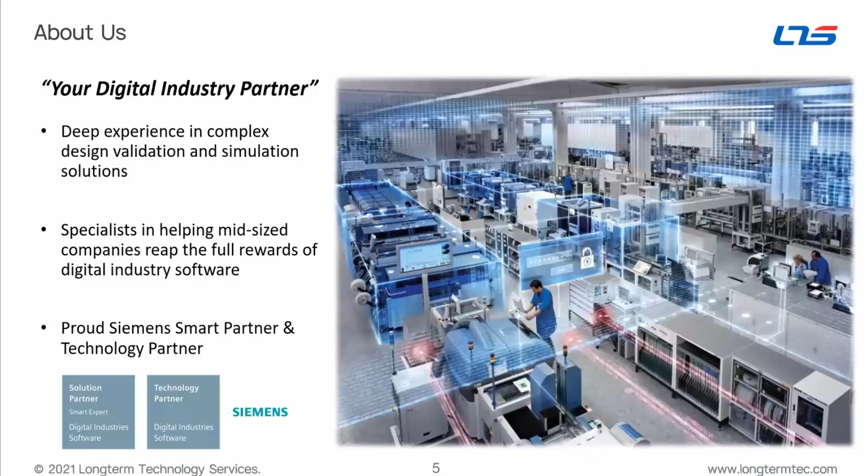Today we're going to be talking a bit about how the digital twin can help you reduce your robot programming time by generating your robot code in the virtual world. But the next webinar is going to be more about directly connecting that virtual world with the real world, through either virtual PLCs or real hardware, where you drive a simulation with your real PLC in order to validate and generate that PLC code.

Here's some things we're seeing at LTS, some key trends we're looking at. There's a number of trends forcing companies to become leaner, smarter, more agile, while somehow increasing the quality of their products. Some of these trends include consumer-driven customization, smart machines, hyperautomation, and global competition.

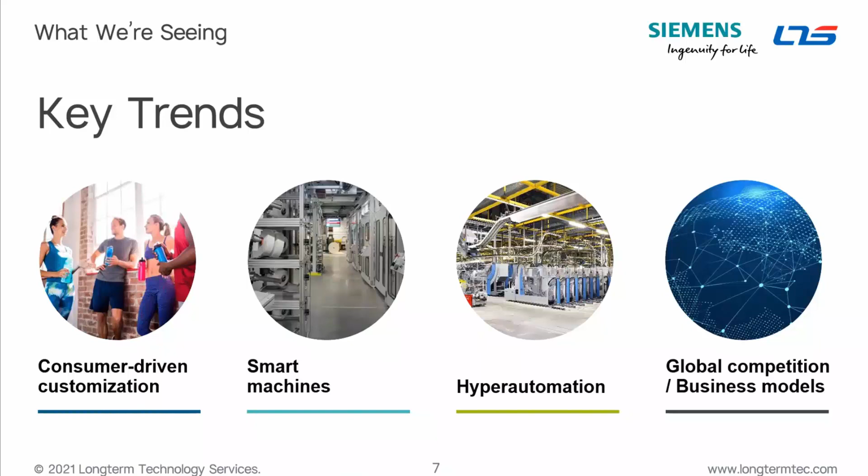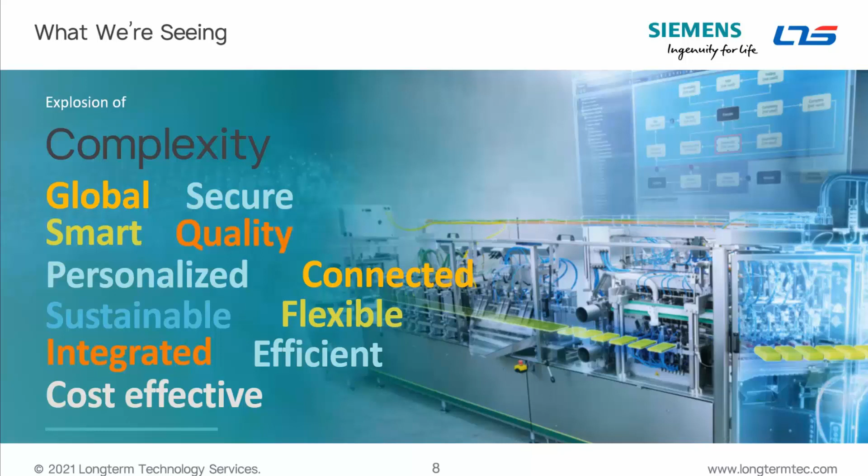Everybody is really feeling these things. At the end of the day, we're seeing a real explosion of complexity, but the real question is, can you deliver more complex things at higher quality in less time? That's not an easy thing to do.

We believe the holistic digital twin is really the way to address these challenges. So what do we mean by digital twin? We like to distinguish digital twin from traditional simulation. Traditional simulation is usually a geometric or kinematic simulation that's pretty theoretical, pretty hypothetical—it's not the reality.

But a digital twin is really a virtual replica of your product or machine that goes into realms like electrical engineering, mechatronics, thermal, you name it, using physics-based modeling. What's most important for this webinar is that you can use these to generate and validate your robotic programming and PLC, which you can then export after validating it in a virtual setting. So now you're talking about a type of simulation, a digital twin that offers a true stand-in for a real object or system, and you can even connect back to that in real time through sensors.

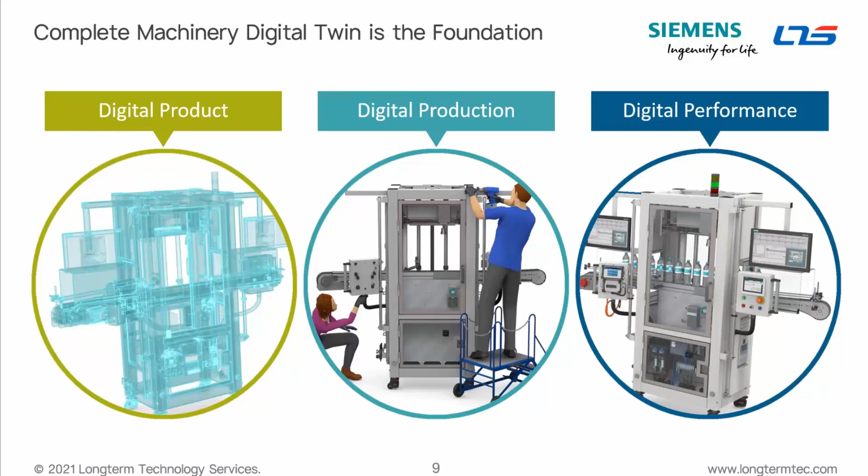That has really big implications for the way we do things in manufacturing and automation. This approach allows you to do what we call shifting left. So shifting left, if you think about a timeline, is about bringing more of your manufacturing and automation concerns, and more of that work, into the design and engineering stages of your product lifecycle. You can do this by performing more work than ever before in a virtual setting, with total confidence that when it comes time to really manufacture or commission that product, you can do it error-free.

So you're not stuck tinkering with a fully assembled machine and production line, losing time and money in the process while you're tinkering, or in many cases experiencing collisions and interferences that you have to figure out after the fact. That can all now be done in a virtual setting for much less cost, much less time, and greater accuracy than ever before. That's really one of the things that has changed and made that type of approach more feasible.

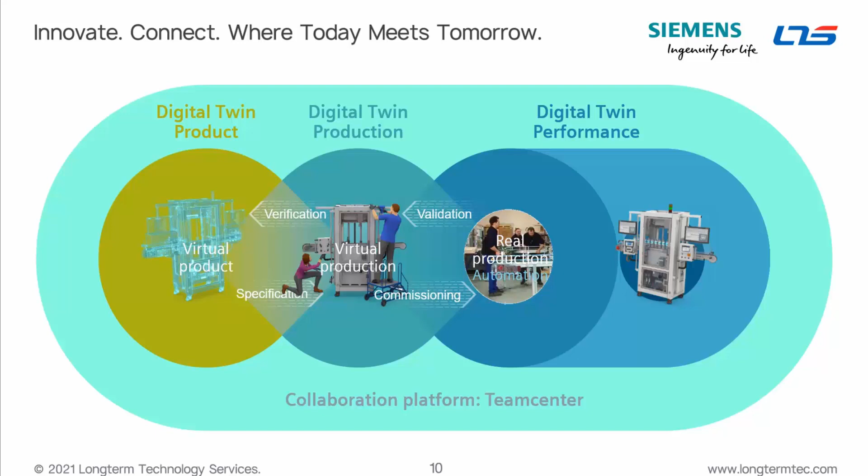Once you've decided that you're going to work with a digital twin, it becomes a question of what scope is right for you. Digital twin technology runs all the way from plant level simulation down to the level of the production line, robotic work cells, robot station, and all the way down to virtual PLC and HMI simulation.

For the purposes of this webinar, we're going to focus on this second level, the robotic station or the line. In our previous webinar, which we will make available through video, we focused more on the entire plant level. Now we're moving down into that robotic programming at the level of the robotic station or the line.

Let's start with some of the key challenges faced by automation and line builders, and also OEMs, during the project phase. First, we should be able to validate cell components that were designed in any CAD system, for example the fixtures, jigs, or other cell components. Going one level up, when we have different robots based on customer requirement, we should be able to offline program it and write specific customer syntax.

Typically it takes a robot-dependent solution provider's solution to program a robot, but in our case we can take it in a single platform. Going forward, you should be able to create a path which is free of collision, and the robot should be able to reach all the locations in the process.

With this, we want to ensure the build quality of our production line. Then we want to go ahead and ensure that we are meeting cycle time compliance required by the customer, finally to meet the throughput requirement of the customer.

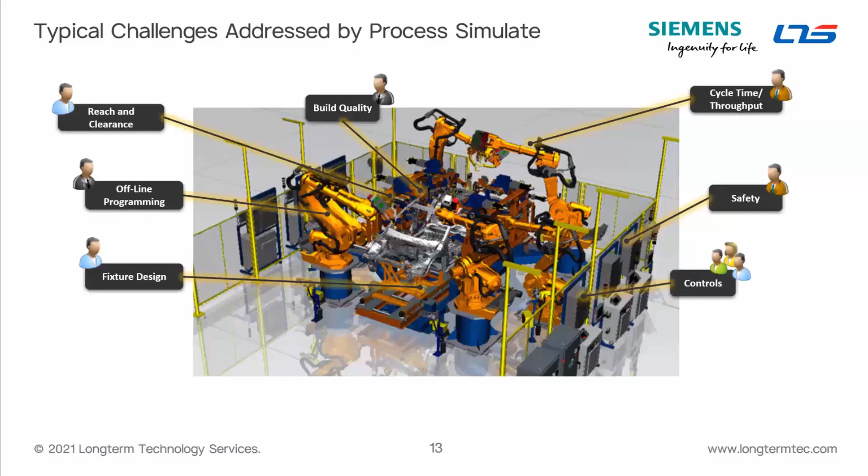Going a level up, when we have automation components such as safety parameters and control logics, our strategy is to utilize digital twin and program it, maybe connect a PLC to the digital twin and drive the simulation, test out your code. Finally, we should be able to optimize the space occupied by the cell components in the line.

What happens here is it's a complex setup. In this complex setup, we should be able to find bugs during the design phase itself, download the program directly to hardware, and save some cost during the construction phase. These are must factors to ensure regulatory and customer demands. This is where Siemens OLP and simulation tools come into picture, which can provide a single platform to validate all these aspects.

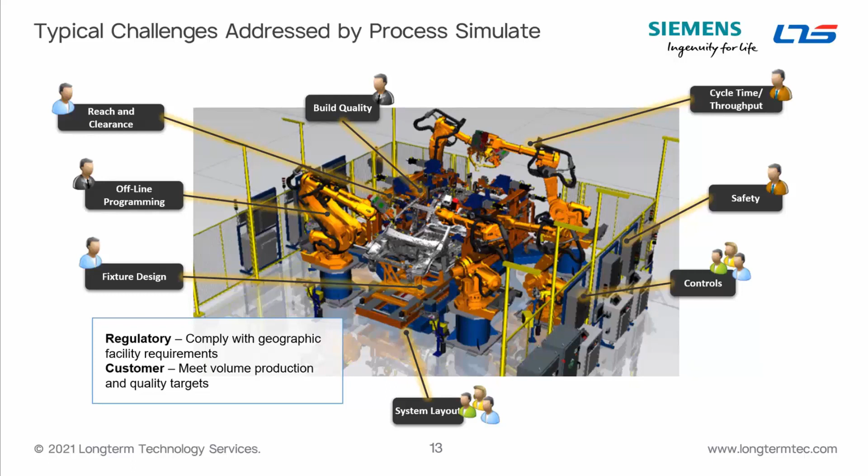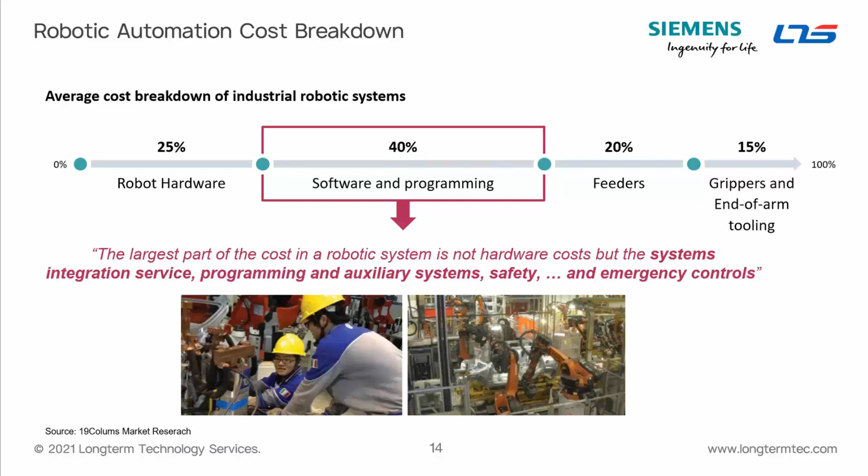When we think of robots, we think cost of hardware is the major investment. Based on market research, it's found that a major chunk of investment goes to robot software and programming. This major cost is spread over the lifecycle of the robot, including cost of integration all the way up to emergency controls.

So how can we reduce this? The solution strategy that we are proposing is to utilize one simulation environment to plan, validate, and handle all the robotic and automation aspects throughout the entire workflow, starting right from simple process definition, ending with a complex virtual commissioning task.

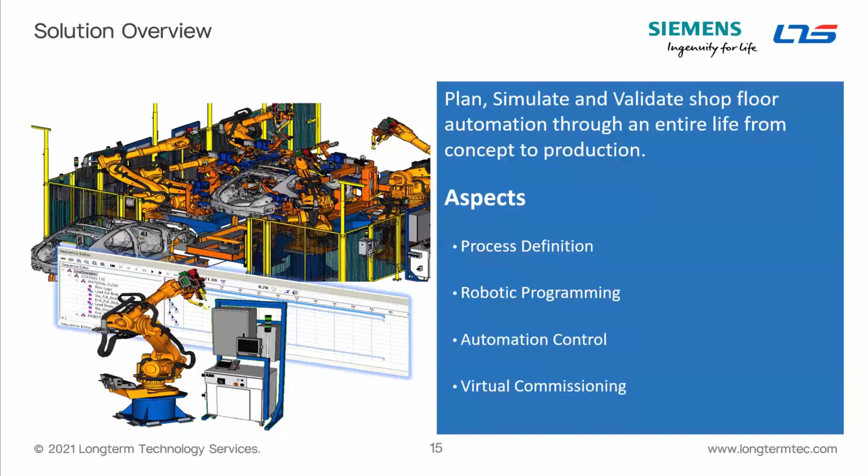Today we will see how you can utilize one simulation platform to simulate robotic cells as well as program it, extend the scope to modern material handling systems such as AGVs, robots mounted on autonomous vehicles, use advanced robotics to teach robots directly, which is called hybrid programming, and finally see how we can collaborate in a virtual reality world for a smart review.

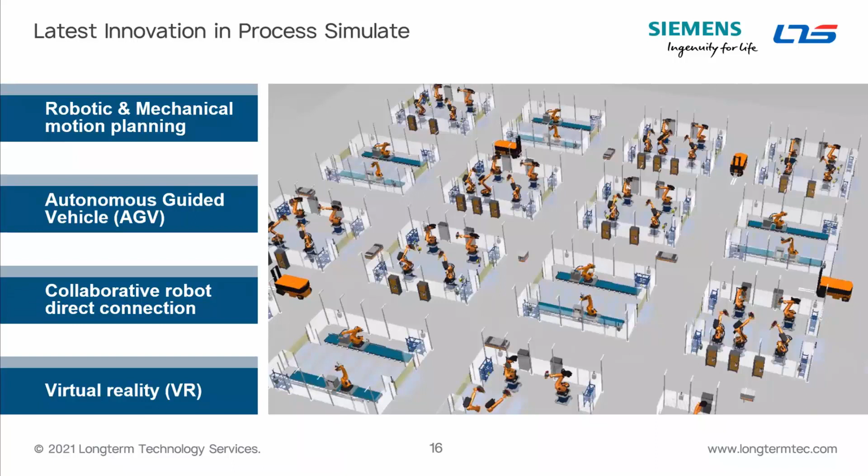So let me begin with the first one, robotics and mechanical motion planning. To build a digital twin of your cell or line, you can import data from multiple CAD systems, for example SolidWorks.

Now you bring in CAD data. You can also bring in robot models from the library, from multiple vendors. We bring that in and start building the robotic cell.

Once we build the robotic cell, we want to create a path that's collision free. With a few clicks, you can offline program the robot once the path is defined. Once the offline program is ready, we download it with a specific robot syntax—for example, Fanuc has its own syntax—in a specific file format. We support all major industrial robots, including ABB, KUKA, and more.

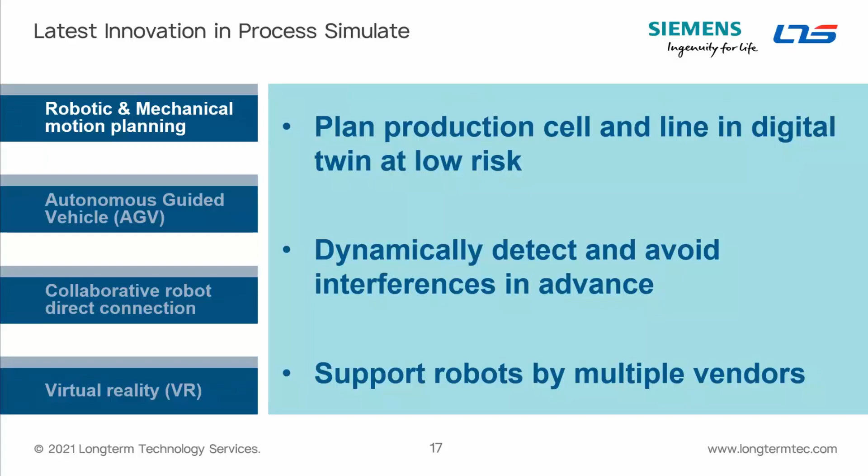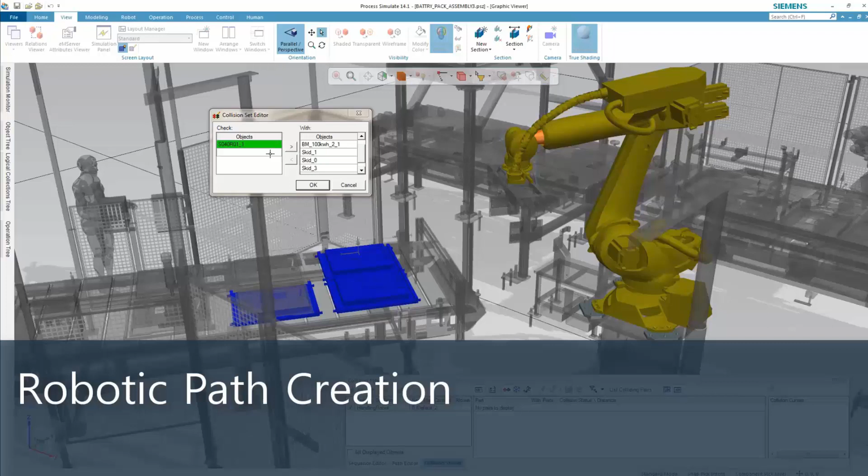In this example, we'll first see a robot collision detection with the cell components and how to avoid that. Second, we'll see robot path creation. Finally, we'll see how easy it is to create an offline program in Process Simulate environment. Let me go ahead and play the video.

During the robotic path creation phase, collision detection is a crucial aspect. Process Simulate helps you dynamically detect collision during the robot simulation and motion planning phase, providing shop floor worker safety and preventing costly equipment damage. In one customer case, the robot collided with equipment, resulting in loss of production time. Using the collision detection mechanism, you can carefully analyze where the penetration is—whether it's a near miss, a through collision penetration, or just a contact collision, as shown on screen.

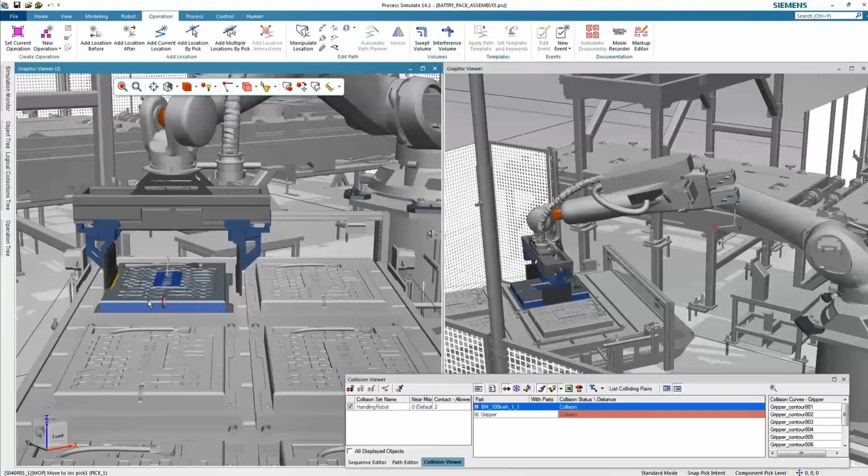At this point, we want to avoid the collision. We can dynamically add a robotic location or modify an existing one easily. You can dynamically drag, drop, and interactively play with the robot cursor. You can copy paste a location and drag and drop it, change the location position within the sequence, rename the location, and more.

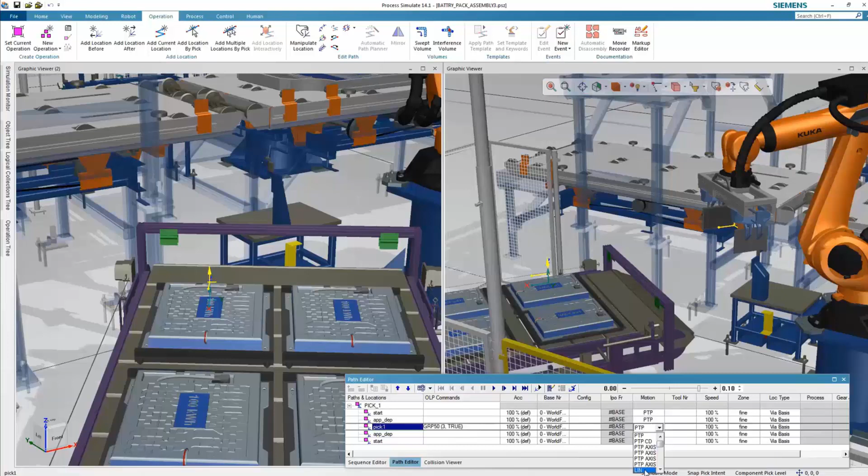Then we simulate the updated path to verify changes have taken effect. You can simulate the entire process sequence in a single shot. At this point, we can go ahead and create the OLP program. Further, we can change motion parameters, such as from point-to-point to linear motion type, and the speed of that location.

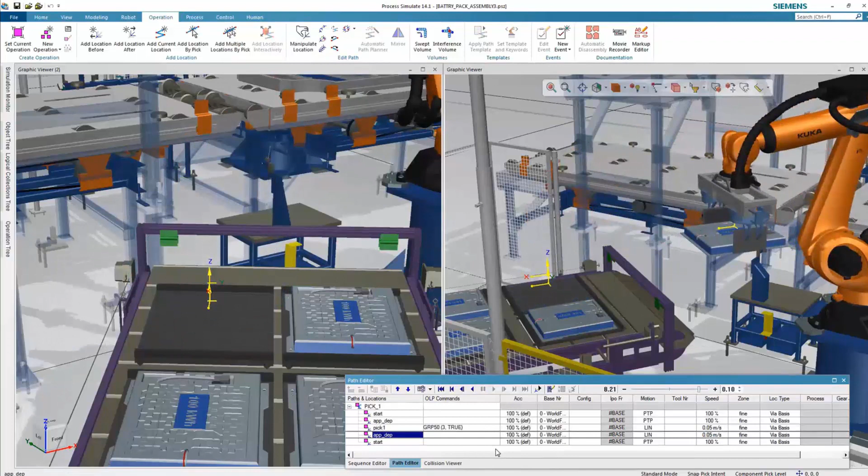Once the OLP program is done, the program with specific robot syntax can be directly loaded into a robot. This gives a major advantage over the online programming method or teach-pendant programming method. So to summarize, using our solution you can create a robotic path free of collision with ease, perform robot programming in offline mode with robot-specific syntax to save time and money, and optimize the path to achieve lower cycle time.

Next, we'll see AGV and robot mounted on AGV cases. Typical material transport equipment used in plants and warehouses is quickly being replaced by automated and smart systems, and AGVs are leading the transformation. Our solution provides one platform to create AGV paths, avoid obstacles, and finally virtually commission an AGV fleet.

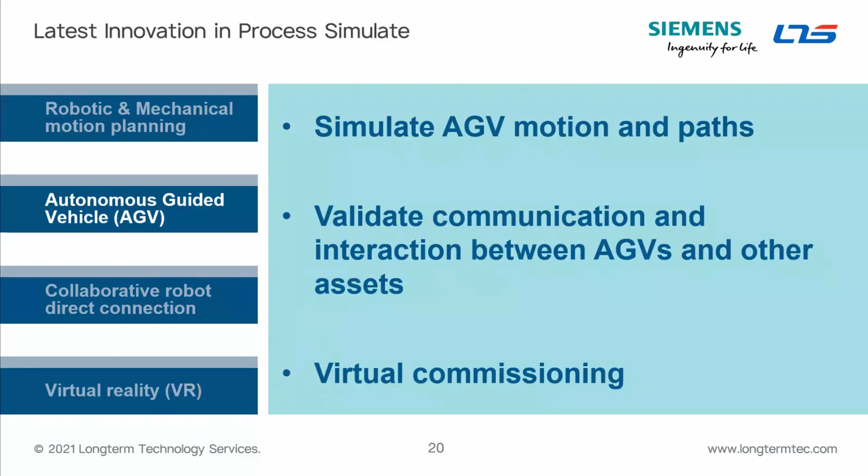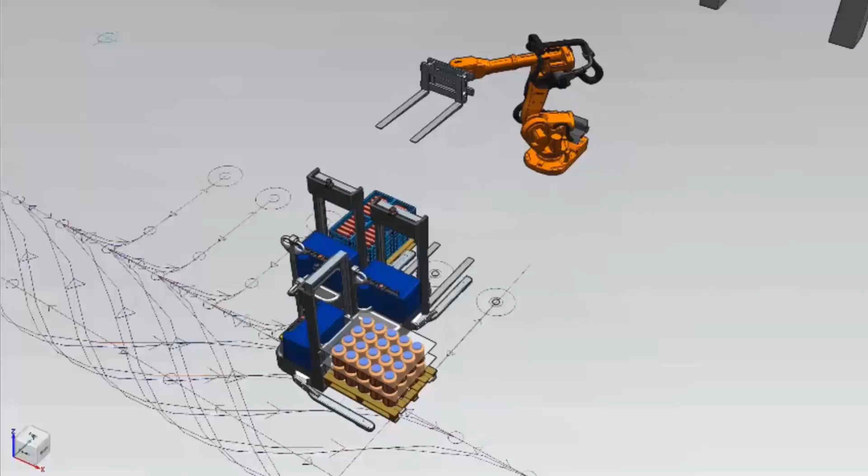Let's see an example. In this real life example, you can see how we simulate AGV paths, the interaction of AGV with augmented automated systems, and finally how Process Simulate serves as a virtual test bed for testing an entire fleet of AGVs. Let me go ahead and play the video.

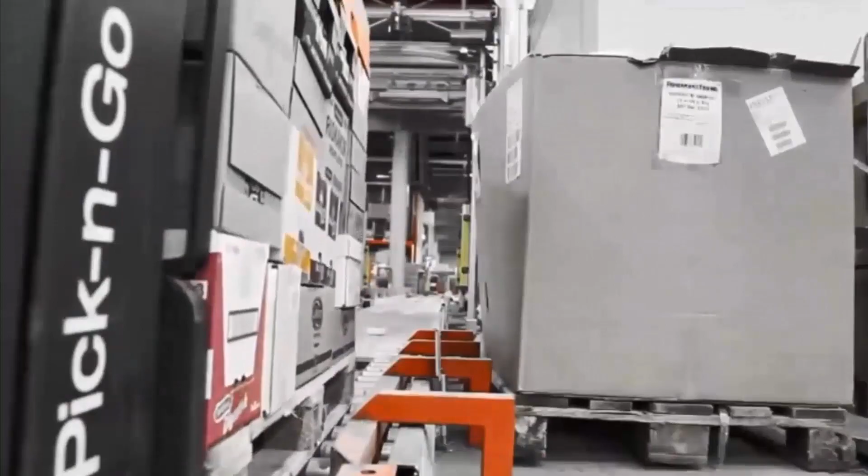AGVs are more and more frequently adopted in warehouses and logistics. You can analyze throughput of a system with multiple AGVs, validate AGV behavior, and combine AGVs with industrial robots together. At this point, we can see an AGV interacting with the robot. You can take advantage of PS to validate AGV path selection and how it interacts with other automation assets.

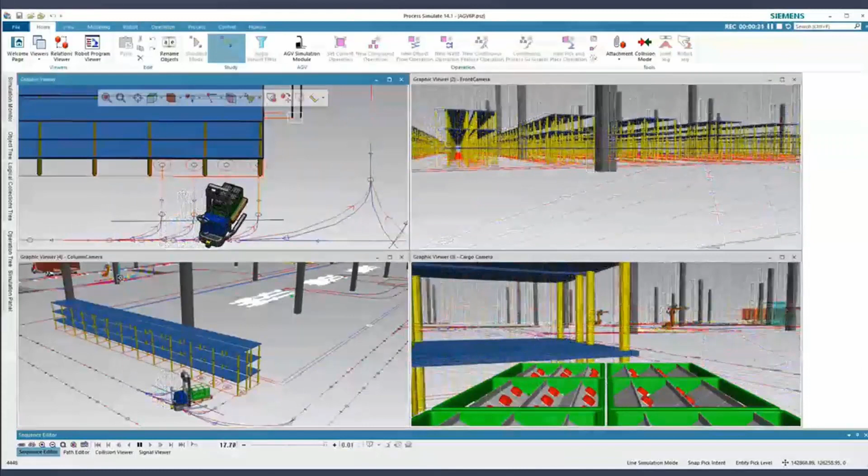When PS is connected to an external AGV fleet management system, its virtual commissioning functionality allows PS to become a virtual test bed. At this point, you can see the AGV interacting, and you can see where there's a collision or not. Basically, the AGV is interacting with the cell components.

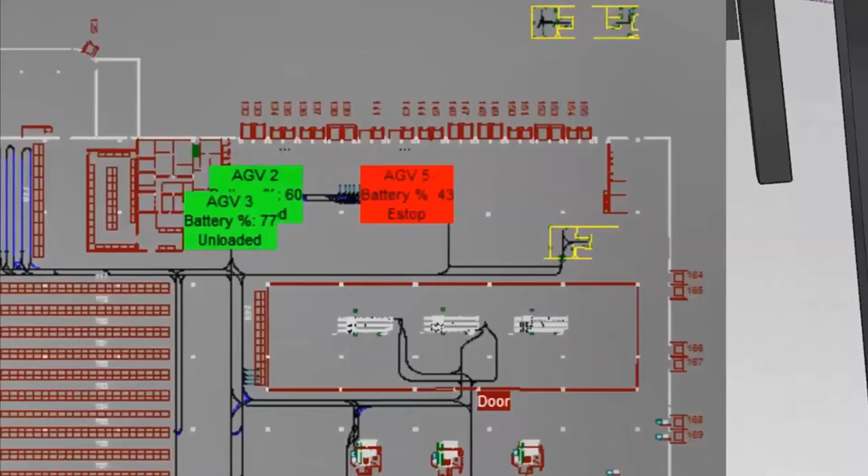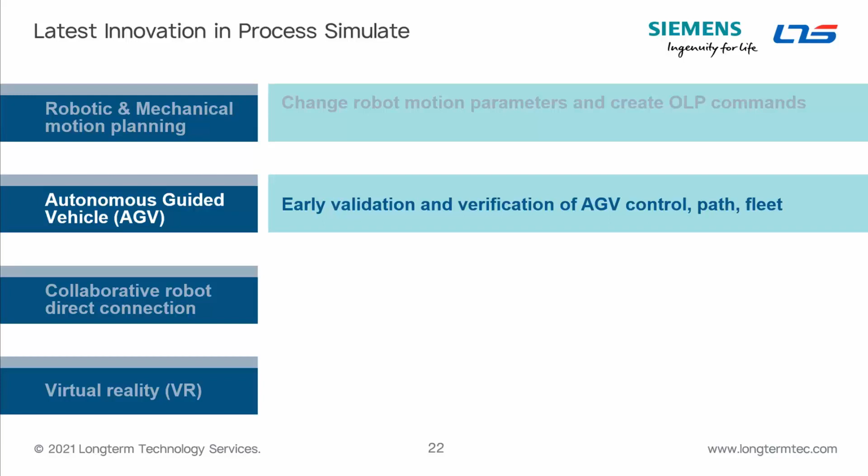Once we have a fleet management solution connected to virtual commissioning, we have direct communication between them. We can detect a human, for example here, and commission the entire AGV fleet. This allows us to minimize the risk and cost of commissioning. Using digital twin in a simulation environment, we're able to simulate detailed AGV parameters such as AGV control, path, and fleet management strategy.

Let's see our next example, a hybrid teaching technique. Here we'll use a universal robot, leveraging the digital twin of a cell and a robot, to validate the entire manufacturing process. PS can connect to a universal robot to replicate the movement of the digital twin. Let me show you how we utilize a hybrid environment using real hardware, a real manipulator, and a digital twin in Process Simulate.

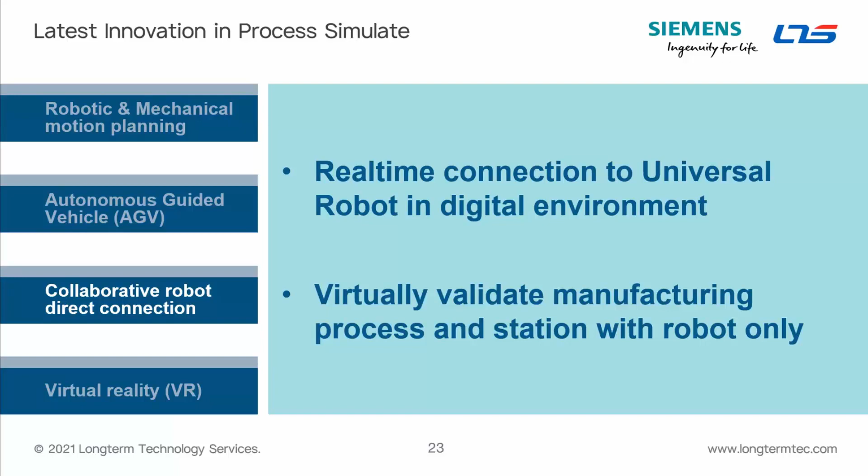In this example of the universal robot, we'll see hardware interaction in online programming. Digital twin motion updates in real time. Real robot interaction with the virtual cell. Let me go ahead and play the video.

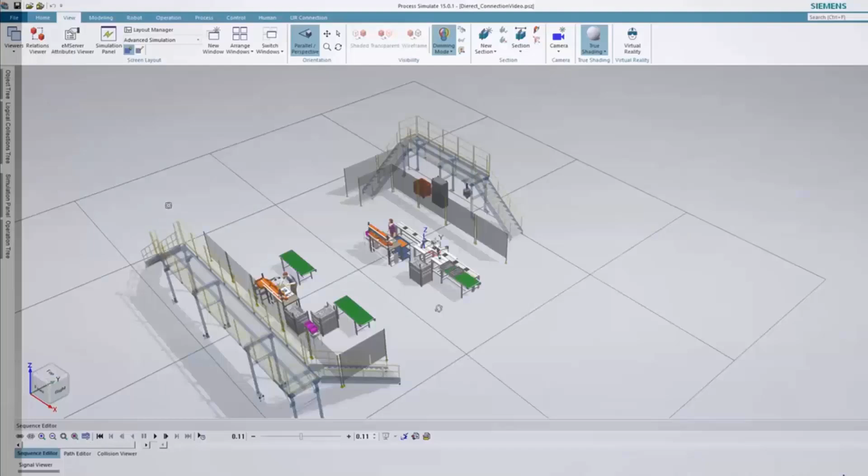Collaborative robots are being deployed to factories, especially for scenarios where robots are working with a human being. One of the most successful cobots is Universal Robots, which Process Simulate already offers offline programming support for.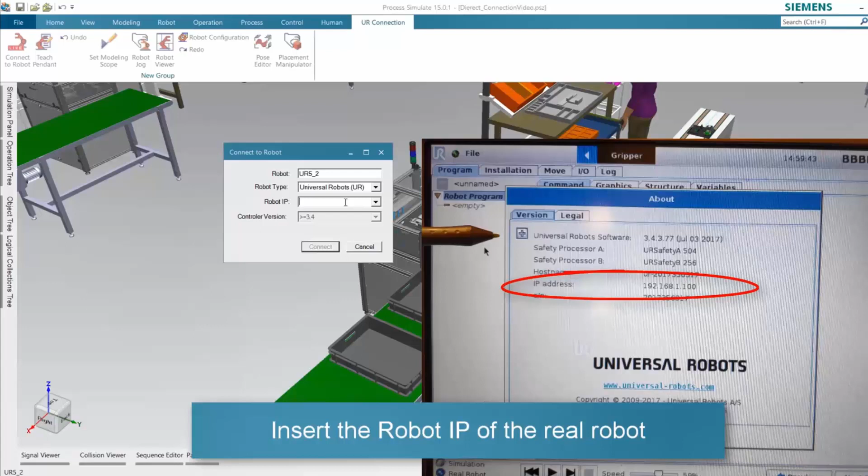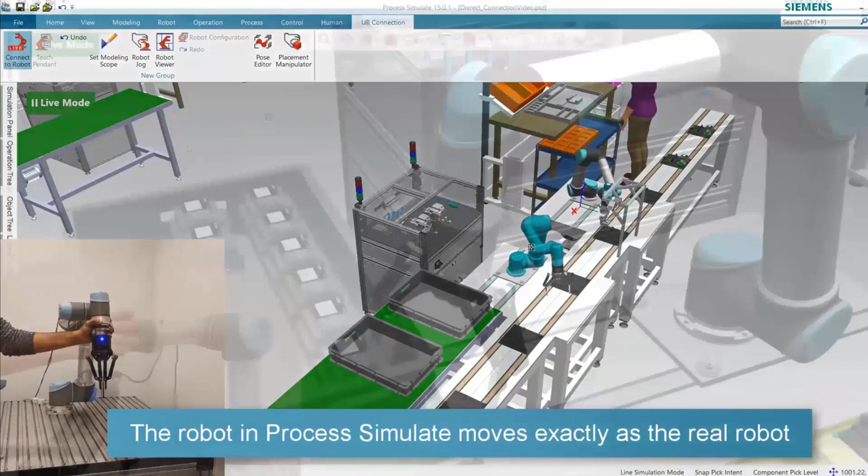PS now extends its offering to leverage hardware interactive online programming functions. With this, you now need only a few steps to make a real-time connection between PS and the simulation environment, using a real UR robot or Universal Robot via Ethernet cable.

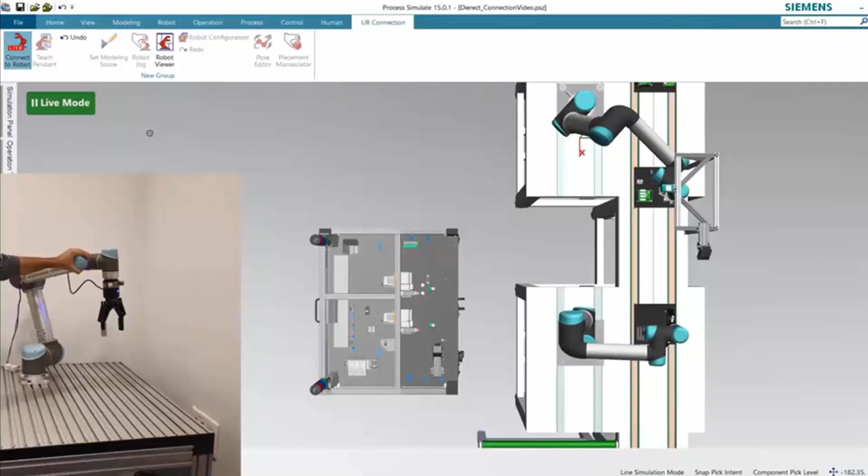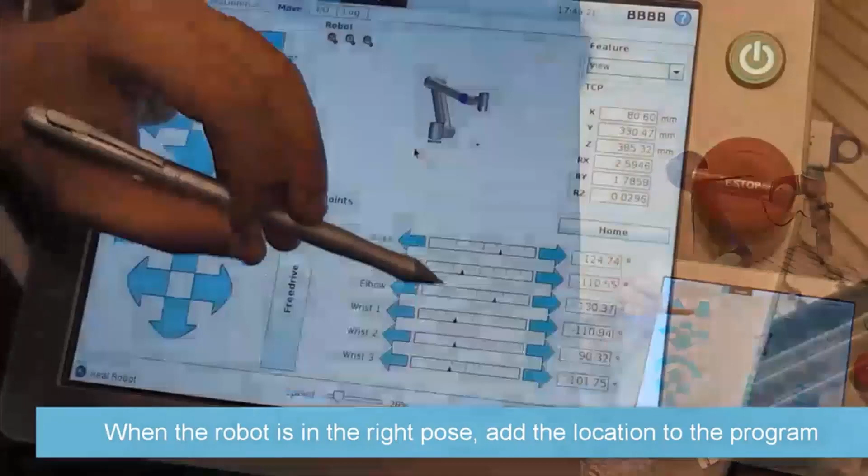Once the connection is established, you can drag and drop objects directly. Use the teach pendant of the robot, and the same thing is reflected in the digital environment. The advantage here is that we don't need all the cell components. We can interact directly with the robot in the physical environment, and it will be translated into the digital environment in real time. This saves time in building the entire facility.

We can have a single robot to program multiple robots. What I mean is that with a single robot, you can use it to program maybe 20 or 30 universal robots, collaborative robots, which are working in the line.

Hybrid programming allows us to interact with the physical robot as well as a digital twin of the cell. This will reduce the programming time. Also, this will allow us to interact with the cell environment without any collision.

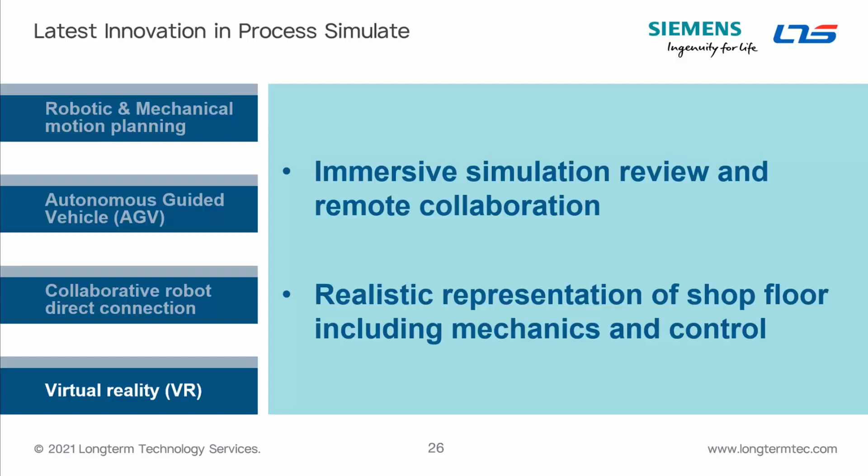Let me go to the next slide. Once the digital twin of your cell or line is ready, you can take this data into a virtual reality environment wherein you can immerse yourself and walk through the digital twin, see where problems are happening. Once you detect those problems, you can take notes and pass them back to your design department, or a customer can comment on the issues and you can work on it.

Let's see an example. In this example, we are going to see how you can take cell data into a virtual reality environment, how you can walk through the digital environment, and finally how to create notes when you detect some issues. Let me go ahead and play.

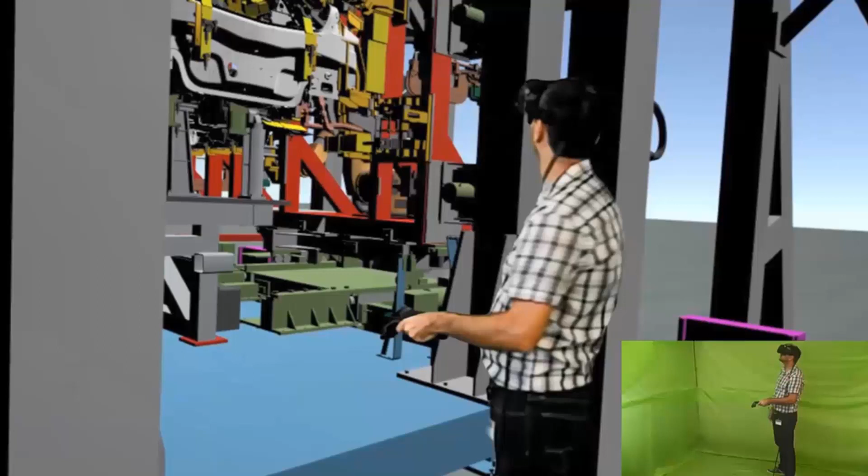Once a Process Simulate study is finished, you can load that study into a virtual reality environment. Once the study is loaded, you can start to navigate inside the cell. We call it teleport, wherein you can move yourself from one point to another with ease. We support the HTC Vive system for our virtual reality application.

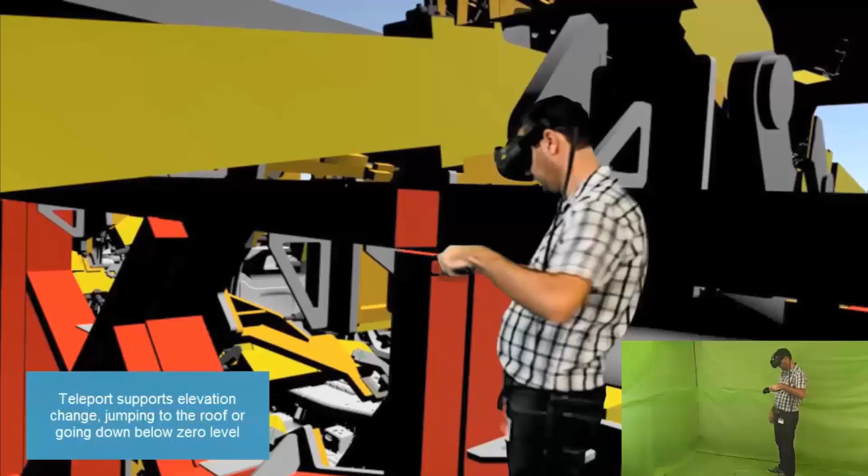One can start the simulation, manipulate a robot, using a torch light to see dark areas. We can literally go on the cell, we can literally go on the robot, which is not possible in real life and may result in collision. If we want to navigate, we can play the simulation at this point.

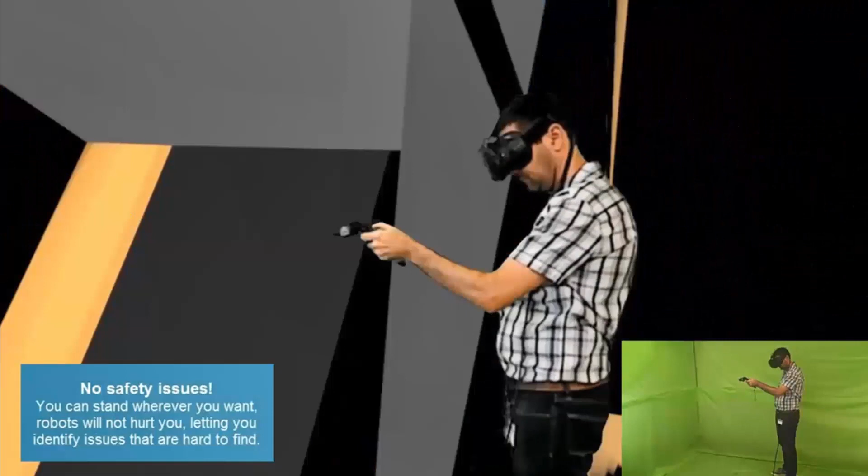We can navigate to different areas and interact with the cell components. For example, here we are moving a robot from one point to another to check the feasibility of where it can fit well.

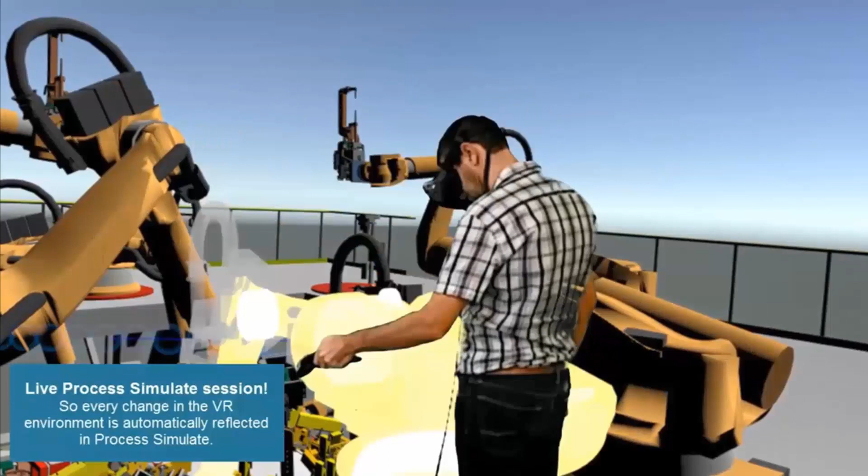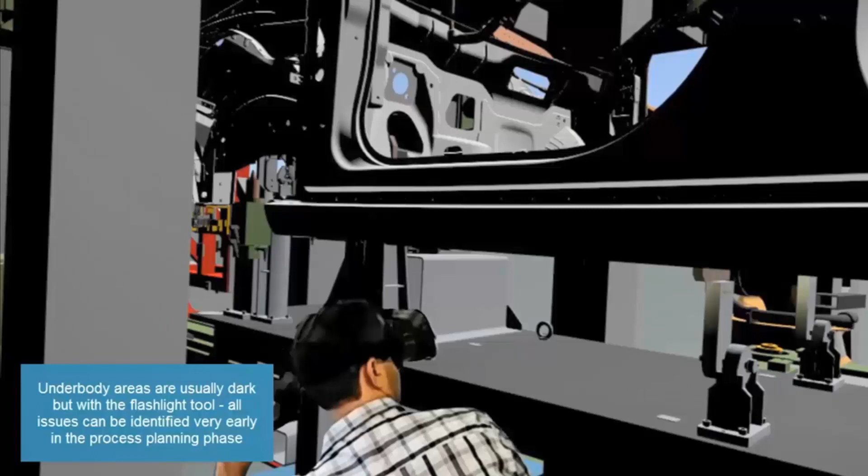Once we have that, we can navigate to other areas, go inside, for example in this case, go inside the car or under the car. Whenever an area is dark, we can switch on the light and see in detail what's happening in the digital twin, which is not possible with real interaction on a real production shop floor.

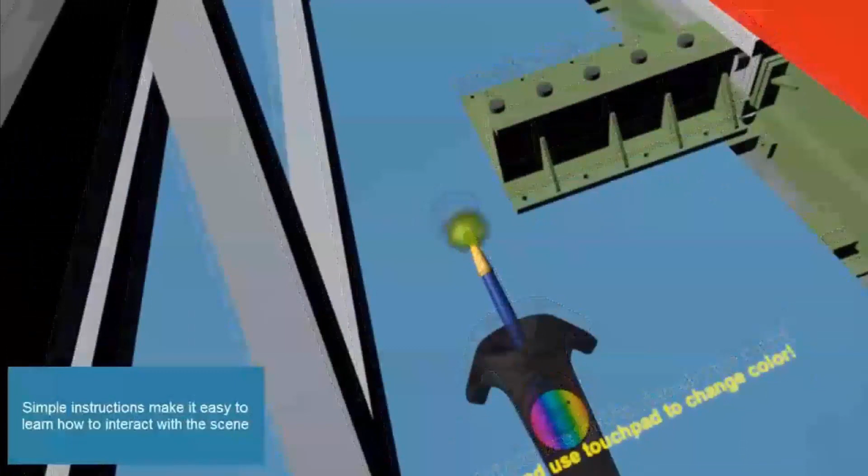At this point we can navigate to a different point and use different options. We detect an issue here, noticing some issues happening in the cell. We want to create a note and send it to a designer as well as a simulation engineer. We can quickly highlight that area, take a snapshot, and send it to a designer for editing and to a simulation engineer for revalidation.

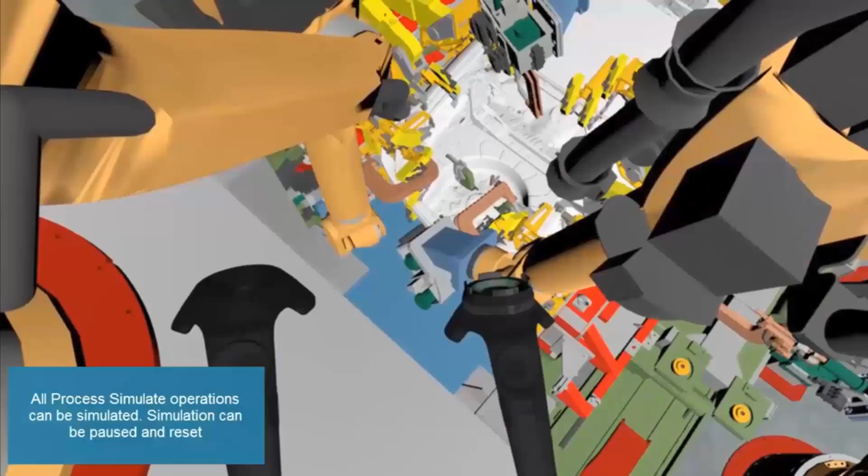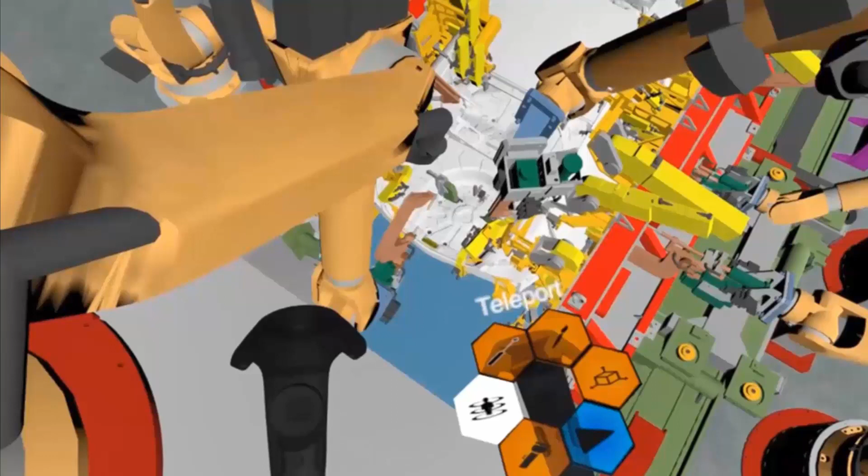We can interactively play with the simulation. It's not static, it's a dynamic simulation here. We can see robots moving, we can see the detailed welding process, and really immerse ourselves inside the environment. If there's a collision, we can detect the collision.

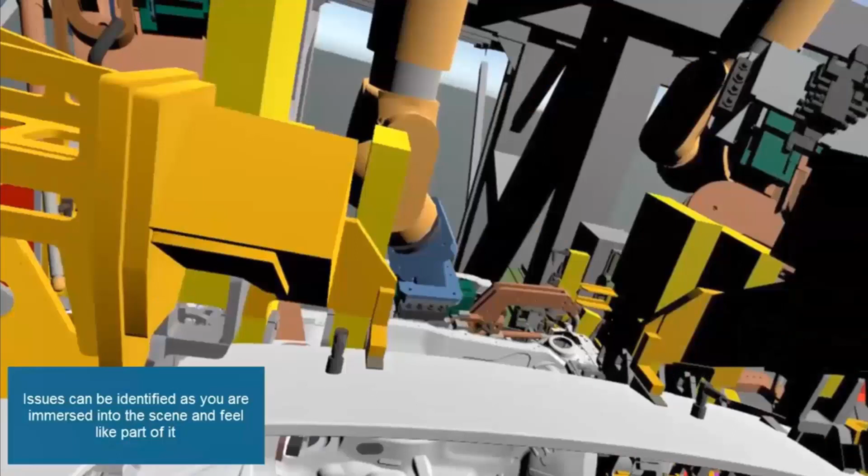We can teleport inside the car, like how we are driving, and see from different angles how the cell components interact with the part, or in this case, a car. Here you can see in detail the welding process, spot welding process, and riveting process.

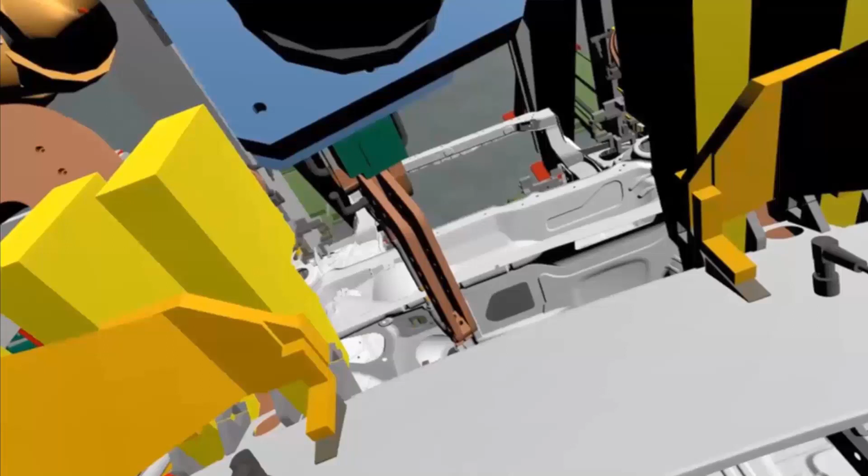Use the virtual reality environment as a smart review tool for internal and customer review, which will translate to reduction in cost and avoiding unnecessary travel. In a nutshell, what we have seen is a robotic application supported by our solution, not just to meet your current requirements, but also geared towards addressing future scenarios such as autonomous robots, AGVs, and collaborative robots, to name a few.

Finally, we have seen how we can collaborate in the virtual world for a smart review when our review is due. With that, I will hand it over back to Philip.